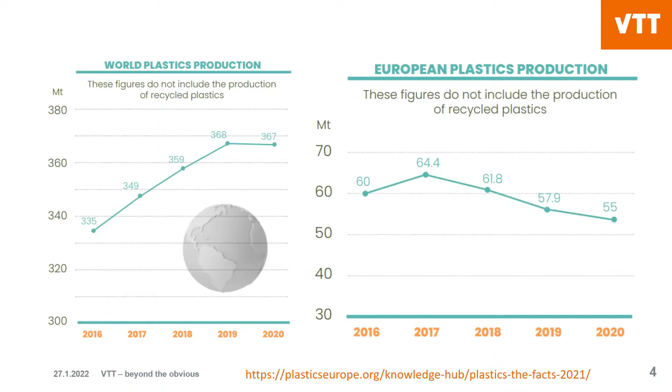So it's been skyrocketing — the demand of plastics in different applications, in different products, worldwide production of plastics. Even in the European context, plastic production is basically increasing and increasing. But there is a bit of a decrease we see very recently, maybe one of the reasons being COVID — you see, for example, in 2019 and 2020 there is a stability. But there is also a lot of research around why plastics can be replaced by some other materials.

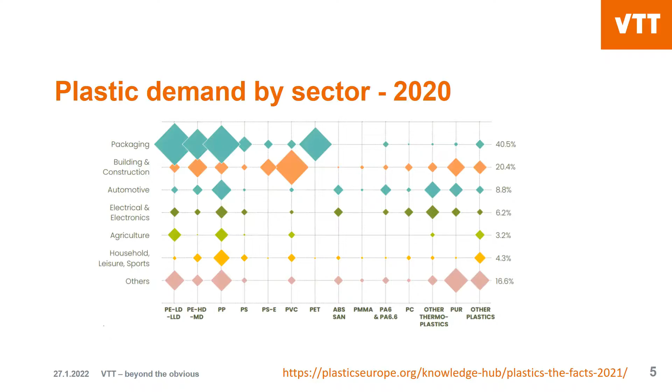This gives an idea of what kind of polymers you will also expect when it comes to recycling, because of course these are the plastics or polymers that will eventually end up as waste. This also gives an estimate of what you can expect. But what happens when it comes to end of life?

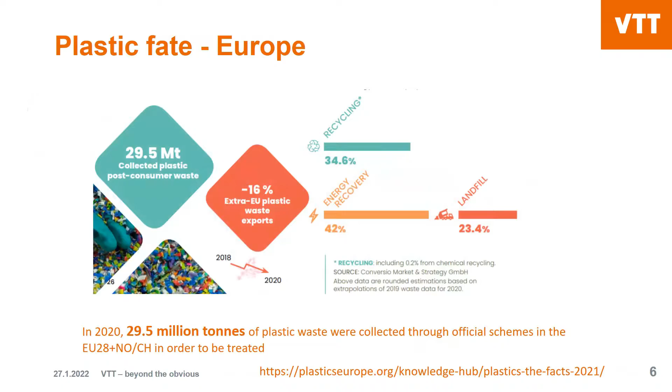You also have to understand what recycling actually is. There is closed loop recycling, there is cascaded recycling, and then there are process losses, of course. Closed loop recycling is when you have a polymer and you bring it back to the same polymer or the same application—so you have a bottle, you make a bottle again, and then you make a bottle again. This is called closed loop recycling. If you take a bottle and make something of inferior quality, that's cascaded recycling. And then in all of this recycling process, there are also losses.

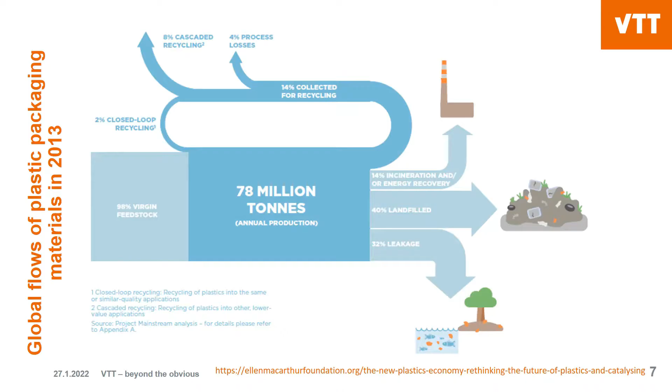The statistics are very important—you have to understand how much of this plastic is available. Then there's pre-treatment of this waste, because the complexity of different types of plastic waste is huge. Sometimes you get very nasty compounds in the plastic waste, sometimes you have different types of impurities in the waste. So the pre-treatment of the plastic waste is quite an important part of the value chain.

Of course, the recycling technology we are talking about today includes all different types of recycling—mechanical recycling and chemical recycling technologies. What are the products we are aiming at from this? What are the upgrading techniques to look at? And then, of course, standardization is really important. When you make a product, you cannot put it on the market unless you have a standard product. You can make an excellent product, but if it's not standardized, you are not allowed to put it on the market.

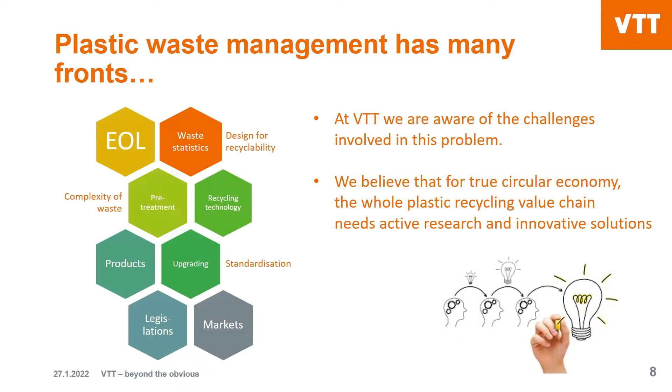No, it's okay. Okay, I heard something. I cannot see, but I'm just talking. If there is any question, just please stop me and you can ask.

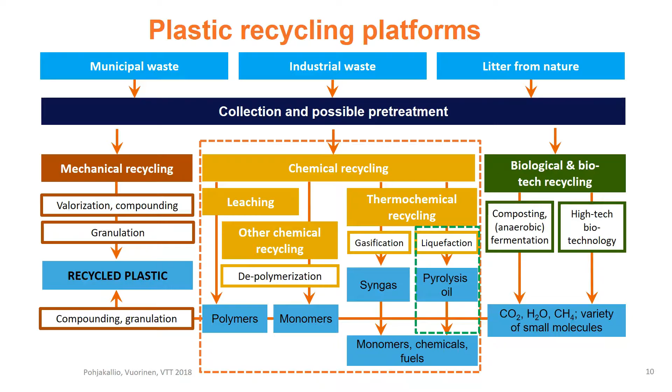If I try to put these technologies in perspective, I don't know, can you see my mouse on the screen? Yeah, indeed. Or maybe this is better.

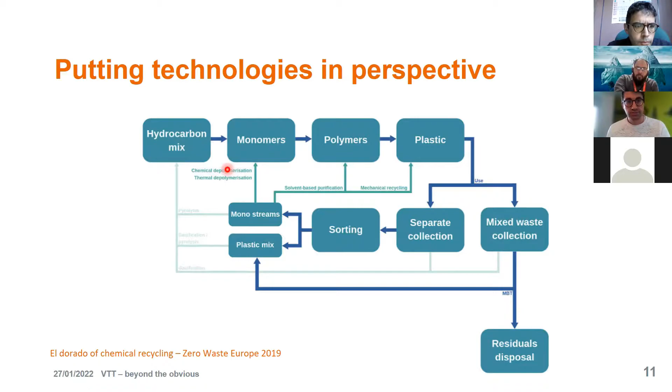So if I start from here, this is the hydrocarbon mixture. Basically from crude oil, you steam crack it, you get monomers, you make polymers out of these monomers, so these are plastics. But once you use the plastics, you can separately collect it, or put it in a mixed waste collection. From the mixed waste, it goes into a plastic mix, or then it goes directly, if it's good enough, to gasification and back to hydrocarbons.

If it is separately collected, then it can go either to sorting and make monostreams, meaning you have very defined streams of polyolefins, PVC, or different types of PET materials. So if you have monostreams, you can pyrolyze it. You can get back either the hydrocarbon mix, or use a chemical depolymerization technique to get back the monomers.

I will talk about those techniques also in my upcoming slides, but this is to put the technologies in perspective, where these technologies can be used for which type of plastic waste. If it is very heterogeneous waste, you can use gasification or pyrolysis. If it is a very pure monostream material, you can use pyrolysis and get the hydrocarbon mixture. Or if it is clean, you can also use solvent-based technologies, get polymers, or mechanically recycle it back to plastics.

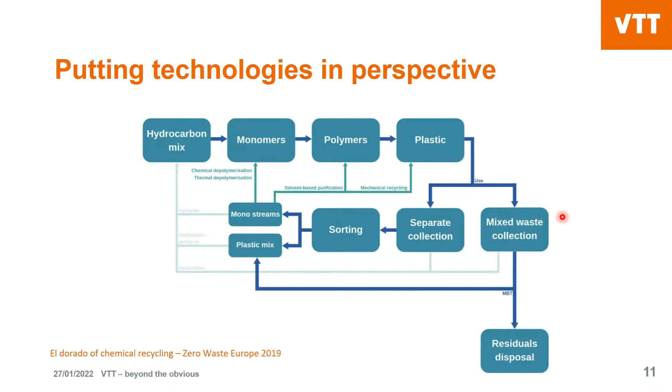This basically explains how different recycling technologies work in an actual value chain. If you look a bit more into the type of waste, this is important to explain why we are applying which technology, why we are applying mechanical recycling, and why we are applying chemical recycling.

So if I say there's post-industrial type of waste or post-consumer type of waste, it can be scrap, processing scrap that can be monoplastics or mixed plastic, or other mixed plastics. For example, if you have monoplastics, that means you can have runners or a fallout product. But if you have, for instance, mixed plastics, it could be multi-layered plastics, foils or sheets. These are all the different examples of different types of waste that is found, and based on these, you can decide where they can be directed.

For example, they can be used internally in the process. These need some sort of recycling or recovery. For instance, a PET bottle is a good example to say it can be recycled. If you look at the quality or properties of these materials, we see that this stream is a monostream, which is a bit more clean, and the composition is known. Similarly for others, you can decide based on where the plastic waste is coming from and where it should be directed.

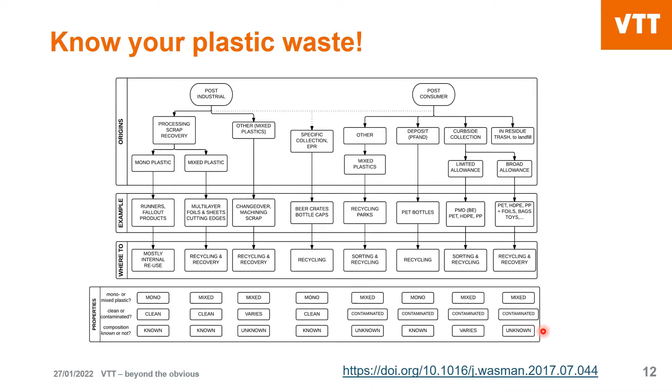Then I will go into the chemical recycling techniques.

We have Muhammad, sorry, there is a question in the chat. Do you prefer that we keep them for the end? It's up to you, what do you think? Well, I think it's maybe better that we go through, and keep all these questions for the end discussion. Okay, that's fine, so you can just type in your questions, and I can go through them at the end, that's okay?

Yeah, perfect. Okay, basically, what makes chemical recycling attractive? There are several reasons why chemical recycling of plastics can be attractive. It can provide you a source of energy, which means pyrolysis oil. It's an eco-friendly fuel, depending on how you think it is produced, compared to other types of fuels. It's an eco-friendly fuel comparatively.

A range of products means from pyrolysis oil you can actually get many different chemicals. Food grade material means the monomers or primary building blocks of the plastics that you get from the pyrolysis oil are so clean that it can be used in food grade applications. For instance, polystyrene is one polymer that can be depolymerized into styrene, and the styrene you get is very pure, so you can basically make food grade material out of it.

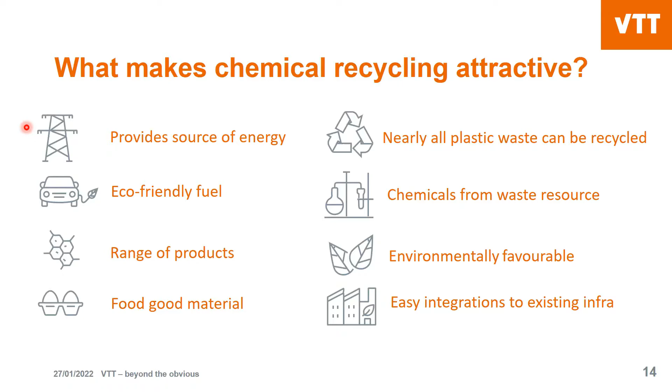Then I will go through some types of chemical recycling and give you some examples. For instance, solvent-based purification, which is based on the solubility of the polymer in a certain type of solvent.

So you have a plastic, different types of plastics. For instance, multi-layer plastics having two different types of polymers blended together, but you may be interested in only one of those. Some solvents have solubility for certain polymers, so the solvent basically dissolves the polymer and the impurities are removed. With this technique, you get the polymers in very good quality.

The downsides are that you need a strict upstream sorting system, meaning the feedstock fed to a solvent-based purification system needs to be of very consistent quality with not many impurities. So if you are processing a multi-layer plastic of polyamide and polyethylene, the solvent will only work for that specific system, so it needs to be pure in that sense.

Only homogeneous plastics are possible with this method. It has a relatively high technical requirement, and the economic and environmental viability is also a bit unclear.

There are some examples that I have written here: CreaSolv, APK, Polystyvert, Ineos, PureCycle. These companies are using solvent-based purification. They also call it physical recycling, meaning that the polymer chain is not broken in this process. The polymer is just dissolved and then retrieved.

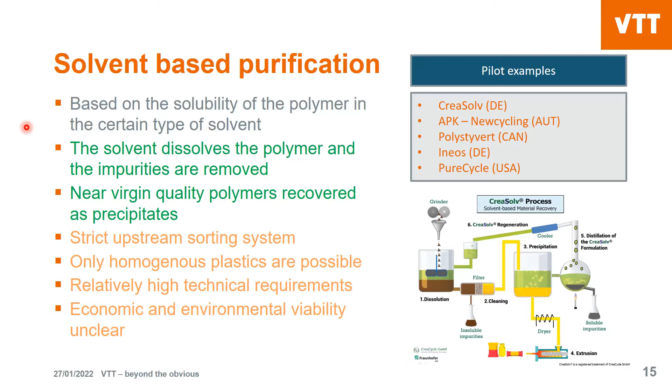Then chemical depolymerization is another method. You have probably studied hydrolysis, alcoholysis, or aminolysis. This is actually the exact reverse of polymerization. In polymerization, monomers join to make a polymer, but in chemical depolymerization, there is a solvent that breaks the polymers into monomers.

A very important example of this technique is PET depolymerization. PET can be depolymerized into its monomers through different techniques: glycolysis, methanolysis, or hydrolysis. It is hydrolysis if water is used as a solvent, alcoholysis if alcohol is used, and aminolysis if amines are used as solvent.

This technique is suitable for polymers like PET, polyamide, and polyurethanes. In this one also, you need strict upstream sorting and only homogeneous plastics. So if you are recycling PET, you only need PET; if recycling polyamide, you need polyamides. Mixtures are probably not so welcome in this technique.

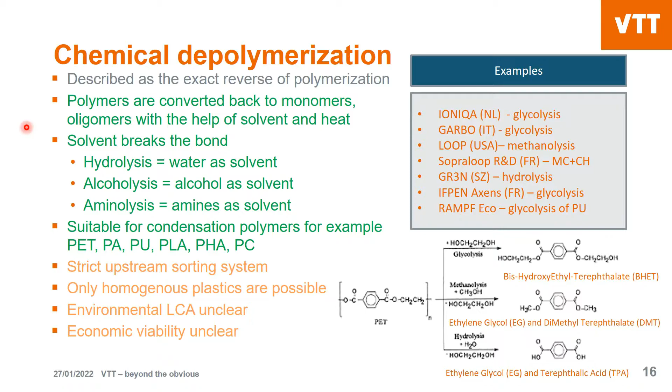These are some examples of companies using different types of these techniques. Then I come to also the thermochemical conversion technique.

Thermochemical conversion technique, pyrolysis, which we will talk about in more detail in later slides. It is the thermal degradation of plastics into liquid fuel components, where basically the organic part is vaporized under thermal atmosphere without the use of oxygen. There is no oxygen.

It's thermally degraded into smaller molecules. This is suitable for end-of-life mechanically non-recyclable plastics. You can use any type of plastic, but preferably this should be used for plastics that cannot be recycled mechanically, because mechanical recycling should always be the first option. If you cannot do it mechanically, then take it to pyrolysis. In this technique, you recover valuable hydrocarbons, including some monomers that you can repolymerize.

Heterogeneous plastics can be treated, so mixtures of plastics. Selectivity and yield can be optimized with a suitable catalyst. So the product you want to get, and the quantity, can be optimized by tuning the parameters of the pyrolysis, or by using a suitable catalyst. Some mild pre-treatment can be needed.

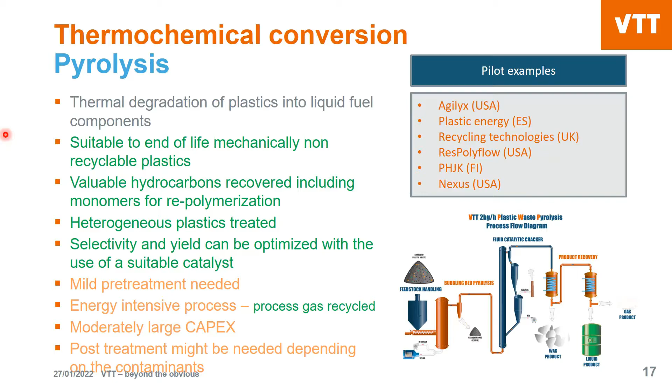Okay, now I'll talk about gasification. Gasification means you are gasifying everything, turning the plastics into syngas, which is carbon monoxide and hydrogen, and these are the building blocks for chemicals.

This process happens at high temperatures in the presence of steam or air, and the carbon monoxide and hydrogen can provide a variety of valuable chemicals through different reaction routes.

Pre-treatment is not needed in many cases because gasification is very flexible on feedstock quality, and heterogeneous waste is possible. But this process is very energy intensive, and gas cleaning is needed because the gas that comes out can be very dirty. It requires a lot of investment, high capex, and in order for gasification to be profitable, large infrastructures are needed. So these systems cannot be made at small scale because they are not really profitable.

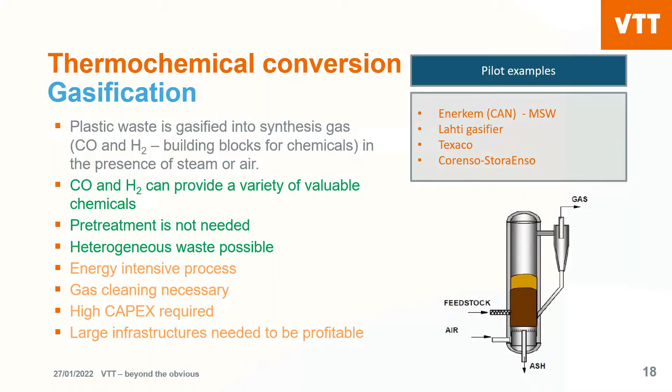But now let's go into plastic pyrolysis. If I take the example of polyolefins, you can take these thermochemical pathways: pyrolysis, gasification, cracking. What kind of products do they give?

If you take polyolefins and thermally or catalytically pyrolyze them, you get a range of products: light olefins, aromatics, fuels, or waxes. If you gasify them using air gasification or steam gasification, you can get energy, or a carbon monoxide and hydrogen rich gas that can be used for making valuable chemicals, and so on. So these are the different thermochemical recycling pathways for plastics conversion.

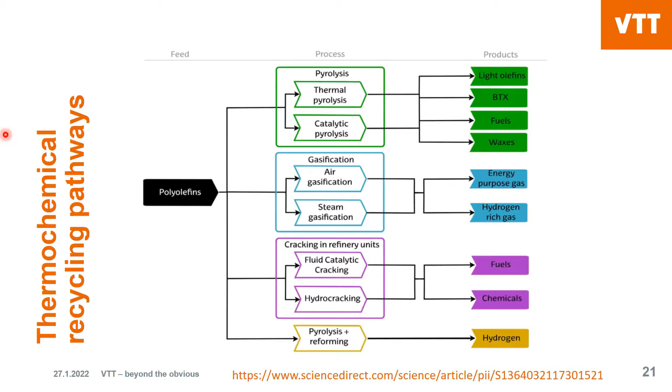Now, if I look closely into pyrolysis, what kind of products can we obtain at different reaction conditions? By that I mean mostly the temperature and residence time of the reactor. At 500°C, a moderate temperature for pyrolysis, under thermal pyrolysis with no catalyst and very short residence time, the products are basically waxes. Plastics will be converted into waxes.

If you use moderately high temperature, between 650 and 800 Celsius, with moderate residence time — a bit more than short residence time, which I'd say is between 1 and 2 seconds — then you get aromatic compounds. If you have very high temperature, more than 800°C, and very short residence time, then you get gases, which are basically rich in light olefins.

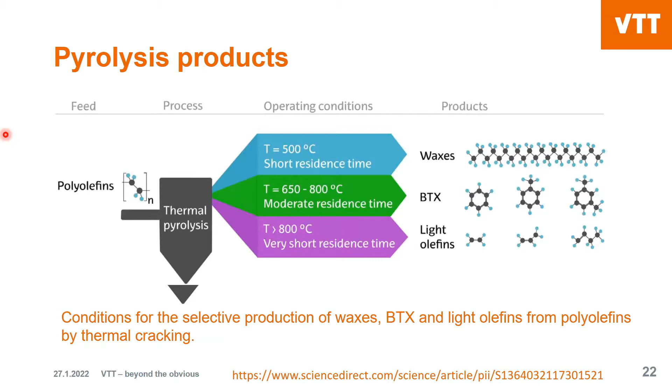What are the factors that affect the product distribution? What defines what your product would look like from the pyrolysis? Temperature, pressure, heating rate, feed composition, residence time, and reactor type — they all influence your final product.

In fast pyrolysis of polyolefins, lower temperatures give you liquids and waxes at less than 600 Celsius. If you go to higher temperatures, you favor gas formation. Pressure has not so much effect — the effect of pressure is dominant only at lower temperatures, but at high temperatures it's not relevant. Heating rate is very relevant.

If you have a higher heating rate, you are basically breaking the bonds of the polymer, so you get bond cleavage. But with a lower heating rate, which means slow pyrolysis, you tend to form char instead — a secondary product, char, from the plastics.

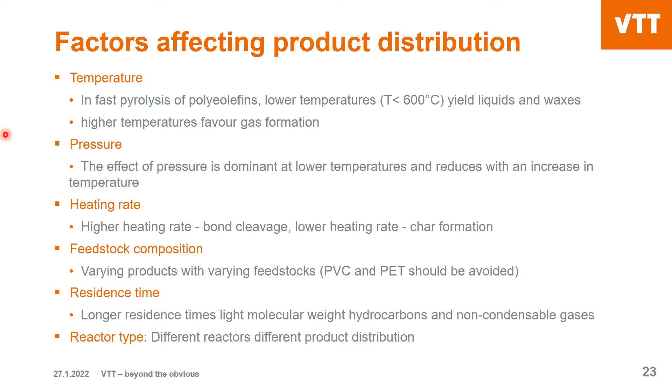Feedstock composition means what kind of feedstock is welcome for pyrolysis. As I said, it welcomes heterogeneous types of plastic waste. It can have polyolefins and others, but preferably PVC and PET should be avoided in the plastic mixture.

PVC tends to degrade into chlorine, and PET tends to degrade into acids. So these two polymers should not be in large quantities in the feedstock, because then your oil will be contaminated with halogens, with chlorine, or your oil will be acidic, which is of no value for future use. So these two types of polymers should be avoided.

Residence time also has a very important role in pyrolysis. In reactors with longer residence time, you get lighter molecules, lower weight hydrocarbons, and non-condensable gases. And in short residence time, you get the opposite of that.

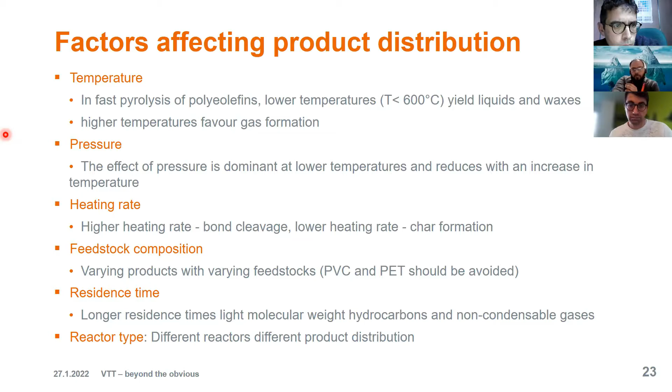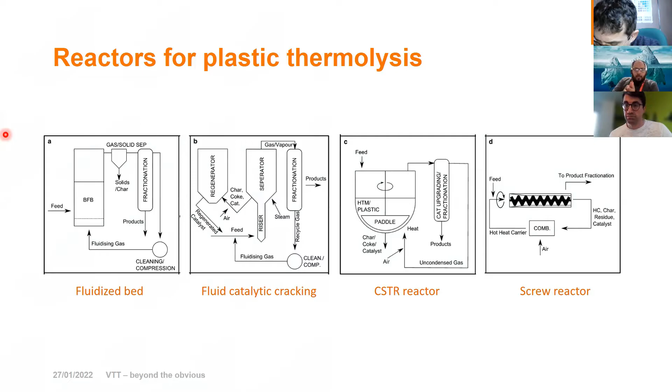Reactor types is really very important from the perspective of pyrolysis, and I will go through, probably in some slides, deeper into what are the different reactor types used in pyrolysis. Basically they can be categorized into 4 different main types, though there may be others: fluidized beds, fluid catalytic cracking systems, CSTR reactors, or screw type reactors.

What is a fixed bed reactor? Basically, they are very small scale reactors used in labs. They operate in batch mode, which means the plastic is placed in the reactor on a static bed, because it's a fixed bed. Any inert material here could be sand or something, and then you put your plastic in.

You heat it up, and then the pyrolysis vapors are condensed in the condensing system, and the gas is collected in a gas bag. It operates in batch mode, so you cannot put the plastic in continuously. The heating rate for this system can vary between 5 to 25 centigrade per minute. The loading, meaning how much plastic you put in, depends on the type of system, but it's still very small, 1-100 grams.

Continuous inert gas is required for purging the pyrolysis product. So you need to have some sort of driving carrier gas that takes the pyrolysis gas away from the reactor into the condensing system.

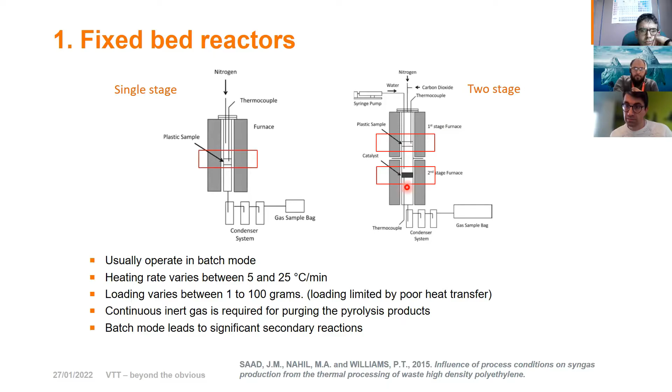It can be used in thermal mode, which is a single stage, where only plastic is degraded and the products are condensed. But on the other hand, it can also be used in 2 stages, which means the plastic is degraded and the vapors are then in contact with some sort of catalyst in a second stage. So catalytic upgrading of the vapors happens here. But these are lab scale units, good for screening, not really for any production.

The advantages and disadvantages of these types of reactors: they have simple construction and are easy to build. Economic operation and maintenance of the unit. It can be 1 stage or 2 stage depending on what kind of product you want, and they can be used in both thermal and catalytic mode.

The disadvantage of this type of system is that temperature control is difficult because the heating is from the outside and there could be temperature gradients. There is poor heat transfer. The catalyst is not replaceable during the operation. So once you have the catalyst, you will just use that. It cannot be replaced during an operation.

Bed channeling means that a product can just channel in the bed. It is not distributed, which can trigger hot spots in the channels, or can lead to secondary reactions forming char or coke. Then this coke deposition on the bed forms a blockage, which means it will increase the pressure drop in the system.

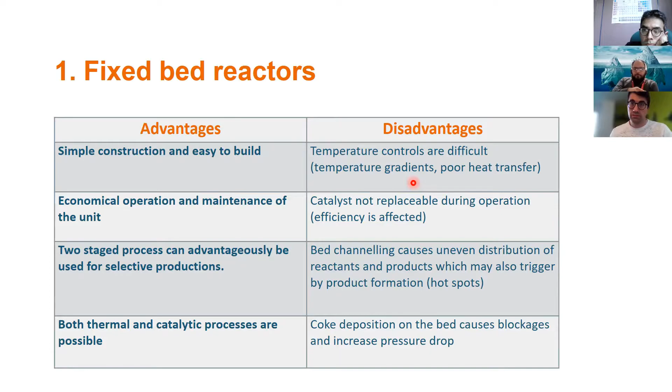Fluidized bed system. In this type of system, you have a bed of inert material, and when you sparge an inert gas through this, then this bed is fluidized. As you can see here in this fluidized mode, the bed height is much larger than what it is initially, and the packing of the bed material is very different, as you can see here.

These type of systems are widely used in plastic pyrolysis, and some of the studies for the research go back into 1970. If you want to look up, Kaminsky is one of the persons who has done a lot of research in fluidized bed reactors for plastic pyrolysis.

They have been tested for up to 30 kilograms per hour on several plastics, and different types of fluidized bed reactors are possible: circulating fluidized bed, bubbling fluidized bed, or conical spouted bed reactors.

Circulating fluidized bed means that the bed basically is entrained into a vessel and is regenerated and then transported back into the reactor. So the bed is moving out of the reactor, goes into the vessel, and then comes back, and it's circulating. This is called circulating fluidized bed.

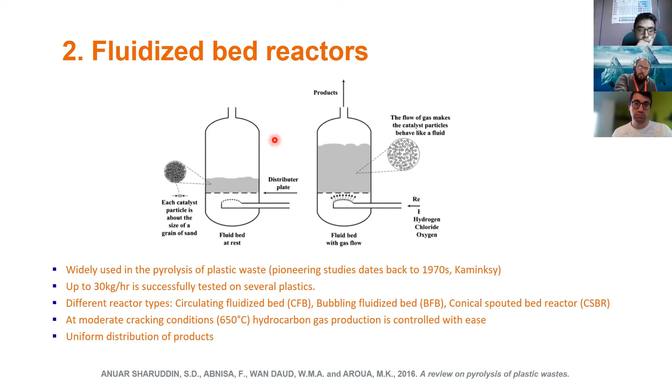This is very advantageous when you have some sort of a catalyst as a bed material, because in the second step you can regenerate the catalyst and bring it back, so burn away the impurities or the coke from the surface.

Bubbling fluidized bed is what you see here. So it's just bubbling, it's not circulating, it stays within the reactor. Conical spouted bed reactors are a special type of fluidized bed reactor with a different geometry, with a cone geometry, which is why it's called conical spouted bed reactors. I will talk more about this in my next slides.

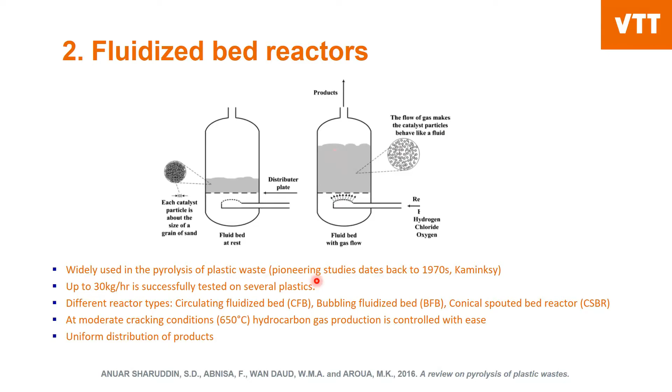If I talk about the advantages and disadvantages of this type of reactor, fluidized bed reactors basically have high heat and mass transfer and solid mixing regimes.

You can vary the gas residence time in the reactor by adjusting the flow of fluidizing gas. If you have low fluidizing velocity, then you have higher residence time, and if you have higher fluidizing velocity, more gas, then your residence time in the reactor is decreased. So you can vary that by changing the fluidization gas.

The product distribution can be flexibly changed depending on what kind of gas residence time you choose to have. Then it's possible to operate this type of reactor continuously, and it's scalable. It's a suitable alternative for the use of catalytic cracking in situ, which means that you can have the catalyst in the bed, in the fluidized bed, as in situ cracking.

In this one, both thermal and catalytic processes are possible. Maintenance costs are not so high. On the disadvantages side, it has a bit more complex design and operation.

Then there's bed defluidization due to agglomeration under certain poorly optimized working conditions, you can have defluidization. So basically what it means is that if you, for instance, have bigger particles of plastics going into the bed, then if the residence time is not enough, they can...

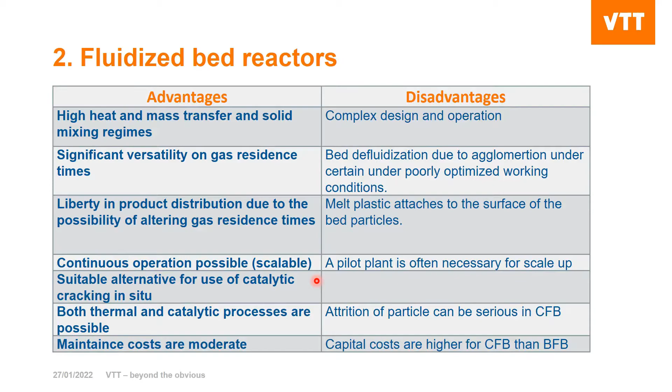...melt on the surface of, for instance, sand or any inert material, and this will defluidize and they will form agglomerates, which means that it's not fluidizing anymore. So the bed will go into the defluidization mode.

And on the other case, if you have the velocity of your fluidization gas not optimized, which means that it's not enough for the bed to fluidize, your bed will be in the defluidization mode. So that's possible, depending on the operational parameters.

In this reactor system, a pilot plant is often necessary for scale up. You need to have a bigger plant to go for the scaled up plant.

Attrition of particles can be serious in CFB. Which means that if you have a circulating fluidized bed, then your particles can break very easily also, because they are continuously moving from one reactor to the regenerator and then coming back and then going forth. So this movement of the bed can cause the particle attrition.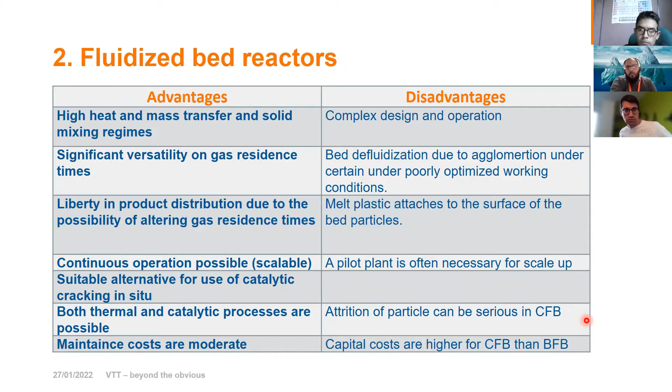They're a bit high, on the higher side of the expense. So the capital cost for making fluidized bed is a bit higher. And in terms of comparison between a bubbling fluidized bed and a circulating fluidized bed, the circulating fluidized bed is also far more expensive than a bubbling fluidized bed.

Conical spouted bed reactors, they are basically again fluidized bed reactors, but have a different geometry. So the reactor is basically a cone-shaped reactor, and this is basically done to maximize the solid mixing regimes. So the mixing in this one, in the fluidizing medium, is quite good.

It can handle particles of irregular texture, varying sizes, in the fluidized bed. So the proprietors of this technique claim that you can have different sizes of material going into the reactor and it will not be a problem.

It gives very vigorous gas solid contact. So when there's fluidization happening, the gas solid contact is quite good. There's a uniform coating of sand particles with fused plastics. So the plastics that go inside there, the mixing of that is quite good.

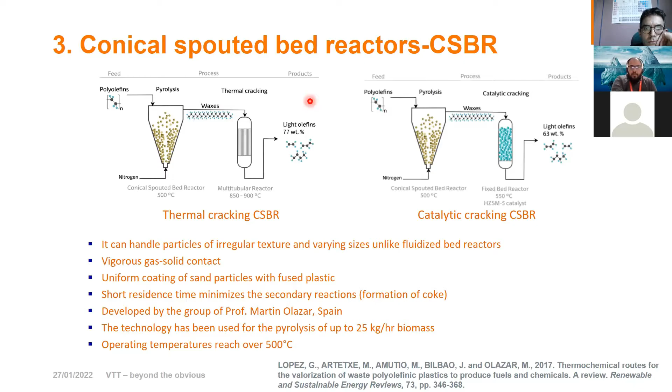Short residence time minimizes secondary reactions, meaning the formation of coke is minimized. This technique has been used in the pyrolysis of biomass up to 25 kilograms per hour, with operating temperatures going up to 500 Celsius. It can be used both in thermal and catalytic cracking.

Looking at the advantages and disadvantages of this type of system: there is high heat transfer rate, the temperature is uniform, and the residence time can be very short, which can be changed depending on the fluidizing velocity you choose. It can be used in continuous operation, has good control on the operating conditions, can be used with catalyst, and there is good contact between solid and gas.

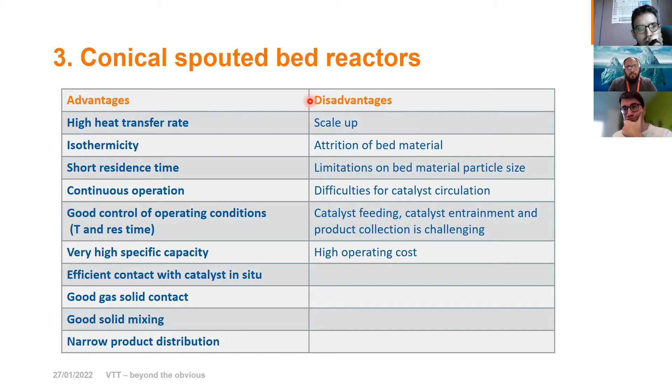On the disadvantages side, the scale up of this system can be a bit problematic. The attrition of the bed material can happen, there can be difficulties for catalyst circulation, and the feeding of the catalyst can be a problem. Catalyst entrainment can also be an issue, and by the looks of it, the operating cost of this type of system is also a bit on the higher side.

Then there is fluid catalytic cracking, which is also quite popular in conventional refineries. In this type of reactor, the plastic feed goes into the riser, and the bed material is transported into a regenerator, which can be catalyst. It regenerates and comes back as regenerated catalyst, which is then circulated. So it's a type of circulating fluidized bed reactor, as I was just telling you about.

In this type of system, once regenerated, it can be used in continuous mode for a long time, with catalyst regenerated and coming back. The gases and the pyrolysis vapor leave the system and go to fractionation, where you get the products out of it. It has been used widely in conventional refineries to crack vacuum gas oil into gasoline.

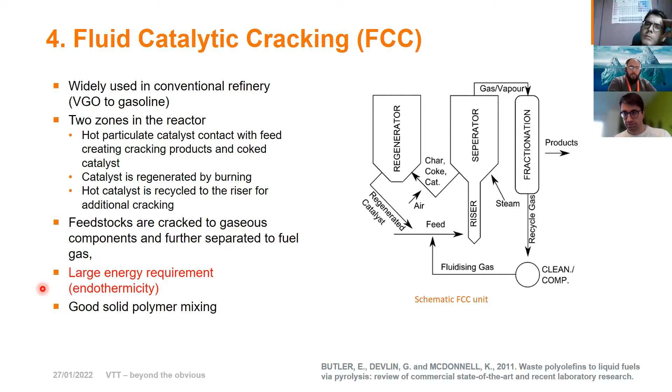There are two zones in this reactor. The hot particulate catalyst gets in contact with the feed, and then the catalyst is regenerated. Feedstocks are cracked to gaseous components and further separated to fuels in a fractionation step. This type of system requires a lot of energy, but on the other hand, it has good solid-polymer mixing because of the circulation.

Another important type of reactor used commercially is a screw reactor. One example is called the Haloclean process from Germany. In this type of reactor, the extruder is made up of a tubular reactor - a tube that has a conveyor inside, or what you call a screw conveyor.

The residence time in this reactor can be varied by changing the speed of the screw and the length of the reactor. The time of plastic degradation depends on how fast the screw is moving, because this transports the material from one end to the other, and also depends on the length of the reactor. If it is longer, you have a longer residence time for the plastics to degrade.

In this particular case, spheres are used in the Haloclean process to avoid any buildup of coke and improve heat transfer, because they are hot and remove any fused plastics on the metal surfaces. They are then collected and recycled back.

This system has been used for thermoset materials, for example printed circuit boards from electronic waste. It has been pyrolyzed in this type of system, and used for efficient removal of chlorine from mixed waste. There are different heating zones, meaning the heaters on the outside of the reactor can be operated individually.

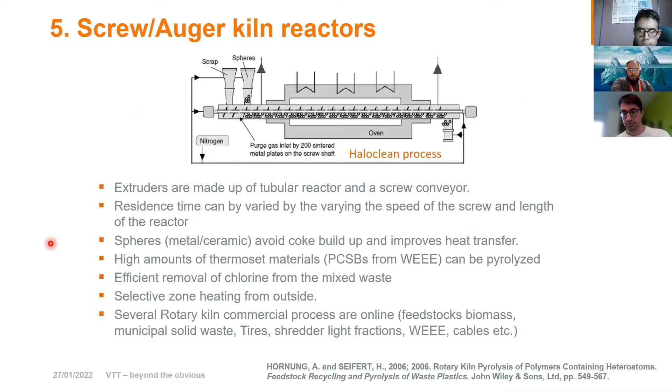So this zone can be lower temperature, and these can be higher temperatures, depending on how you want to optimize your reactor. They can be of the same temperature or different temperatures, depending on what you want in the end. Several of these types of reactors are being used commercially for different types of feedstock, including biomass, tires, or automotive waste.

One new emerging technology in pyrolysis is microwave reactors. They are still in their infancy stage, meaning they are at very low TRL. There are positive and negative sides to it. They are very attractive for heat transfer, because with microwaves it can reach up to 1000 Celsius very easily and very fast, since it's using radiation.

Plastics themselves are a poor conductor of heat, which means they have to be mixed with some sort of material that improves their conductivity of these radiations. So some sort of carbon is mixed with the plastics in this.

It's easy to design, but scale up can be difficult, and mixing of plastics inside a microwave reactor can be tricky. But you can combine it with catalytic upgrading of vapors, and depending on what kind of catalyst you use, you get different results.

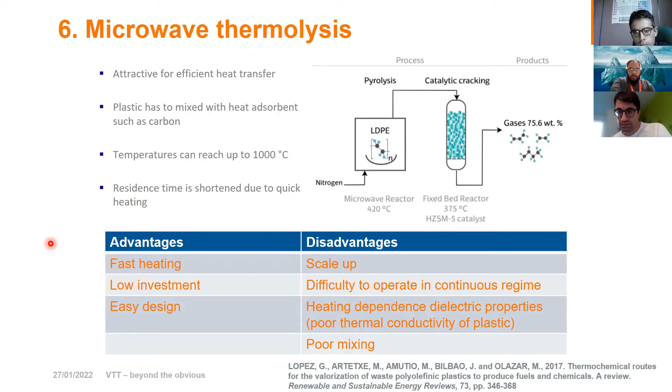Stirred tank reactors are also very interesting and widely used in this type of system. They can be internally heated or heated from the outside. They can contain catalyst with the plastic inside the reactor, but the upgrading can take place outside, so a distillation column can be used together with this type of reactor, where the pyrolysis vapor goes to catalytic upgrading or fractionation.

In this type of reactor, secondary reactions dominate, meaning you can get a lot of aromatics or a lot of char because of the residence time in the reactor. Longer residence time means more secondary products. It can require frequent maintenance, and because of the nature of this reactor, temperature gradients can also exist. But it has been used in several commercial technologies, some of which I have mentioned here in different countries.

Just drink some water.

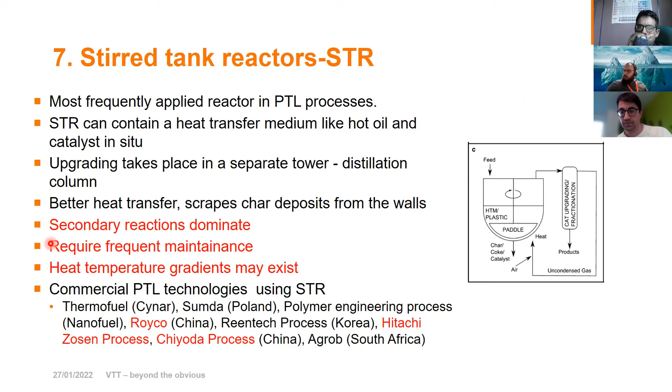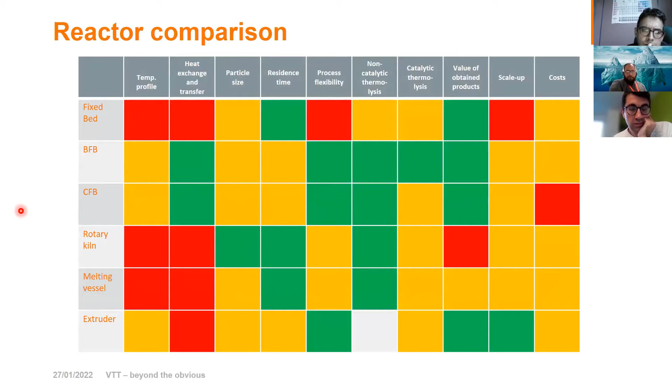Now I will jump to catalytic pyrolysis and try to explain the difference between catalytic pyrolysis and thermal pyrolysis. If you look at this picture, there is a comparison of thermal pyrolysis and catalytic pyrolysis.

In thermal pyrolysis, there is more energy demand. Basically, if you need to pyrolyze some plastic mixture and it needs 600 Celsius for degradation in thermal pyrolysis, in catalytic pyrolysis it might only need 500 because of the use of the catalyst. The catalyst lowers the activation energy, or the degradation onset.

So there's higher energy demand in thermal pyrolysis, meaning higher temperature requirements. There can also be impurities in the liquid fuel in thermal pyrolysis if there are impurities in the feedstock. The liquid fuel can contain impurities and can have a low octane number, but on the other hand, it produces high liquid yield with heavy oil. The gases from this pyrolysis are produced in lesser quantities, but can contain carbon monoxide and carbon dioxide. The char from this process can be in high quantities, even at low temperatures.

But if you use a catalyst for the same process, you have the possibility to remove impurities, because the catalyst can also act to absorb some of them. It also means you require less energy for pyrolysis, because less temperature is needed for the same degradation. Looking at the products, the liquid yield is decreased because gases increase—you get more cracking, more gases—but at the same time the quality of the liquid is improved, with a narrower range of hydrocarbons in the liquid fraction. The gases produced from catalytic pyrolysis contain a lot of valuable C3 and C4 compounds. In catalytic pyrolysis, char production is decreased, especially with catalysts having high surface area.

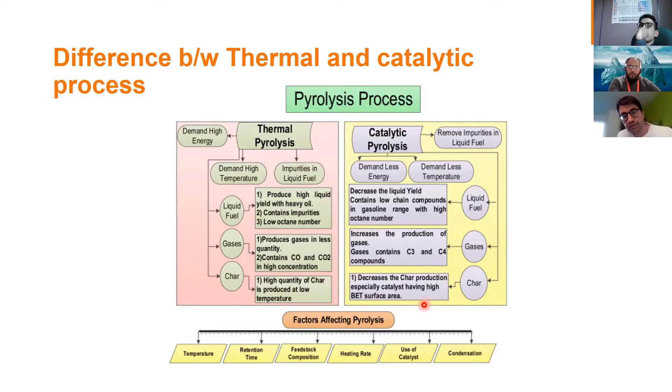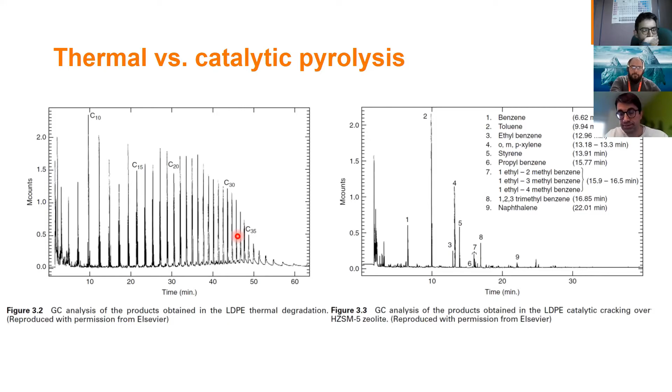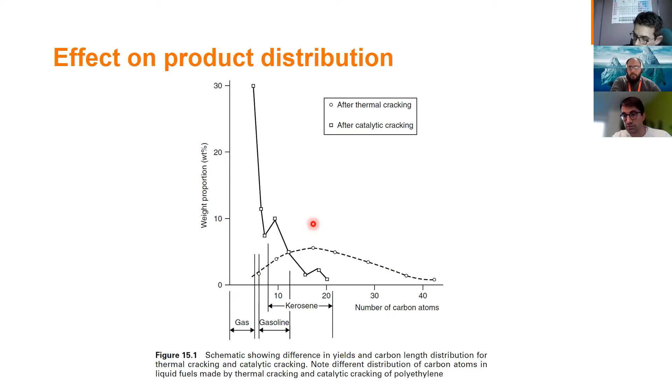This is why catalytic pyrolysis can be advantageous. What is the effect of the catalyst on the quality of the liquid oil?

Basically, the catalyst affects the pyrolysis mechanism and converts, for instance, heteroatoms like oxygen and nitrogen into the gaseous phase. It can decrease the halogen content in the oil. So if you have, for instance, chlorine in the oil and you have a suitable catalyst, then by thermal pyrolysis you can get a lot of chlorine in the oil. But if you have chlorine in the feedstock and you're using a suitable catalyst, you can capture a lot of chlorine in the catalyst, and then your pyrolysis oil is free of halogens.

For instance, a zeolite catalyst can decrease these types of heteroatoms like nitrogen, and it can also decrease phosphorus and sulfur content in the pyrolysis oil. Catalysts can remove oxygenated species from the oil. So for instance, if you have PET in the feedstock, it can induce oxygenated species in the pyrolysis oil. These types of catalysts can also reduce these oxygenated species from there.

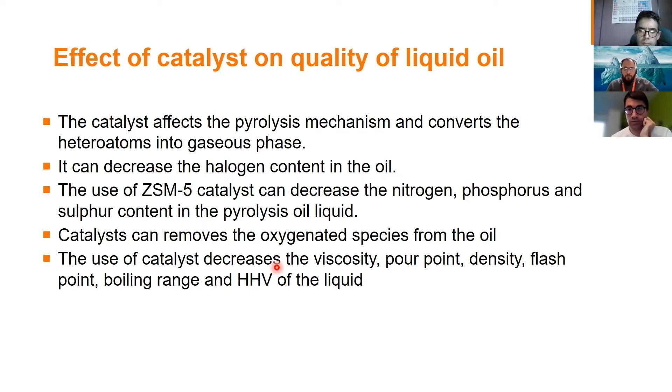The use of the catalyst can increase the quality of the oil by decreasing the viscosity, pour point, density of the oil, and different properties. Here you see the effect of the catalyst on different properties of oil. The density can drop, the viscosity can drop, the octane number can increase, the cetane number can increase, pour point can decrease. So these are several advantages of using a catalyst that will enable your pyrolysis oil to be useful. You can get some of these properties improved by increasing the temperature, but not all, and only to a certain extent.

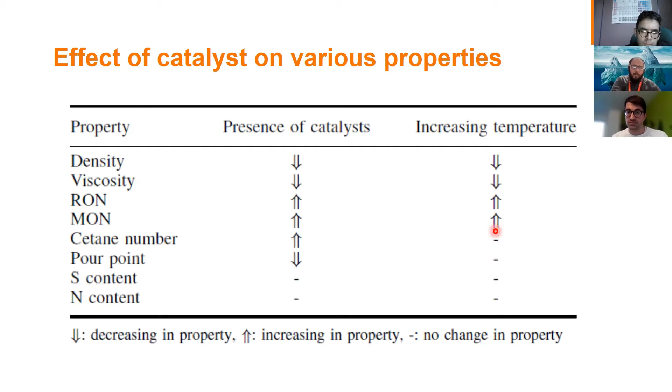So what is the effect of the catalyst on the gases produced? Basically, the catalyst produces gases, mainly hydrogen, methane, carbon monoxide, carbon dioxide, depending of course on the polymer used. For instance, PET can produce a lot of carbon dioxide and carbon monoxide. Polyolefins tend to degrade into very olefinic types of gases. For instance, this ZSM5 zeolite can produce gases that contain mainly C3 hydrocarbons from polypropylene and C3 and C4 hydrocarbons from packaging waste.

As I said, light olefins are produced in high quantities with the use of zeolite. So your gas is very valuable. It contains a lot of olefins that can be used to make polyolefins.

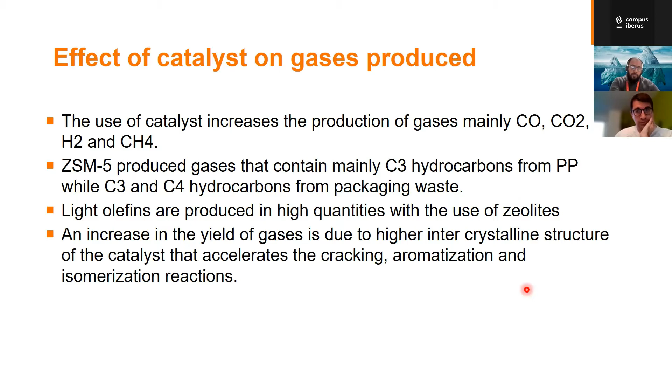Then I can quickly jump to other characteristics of the catalyst. Basically, there are various properties of the catalyst that impart different sorts of characteristics to the process itself: acidity, surface area, pore size, and the structure of the catalyst. An acid catalyst basically shows more cracking in pyrolysis compared to a basic catalyst, but at the same time a high acidic catalyst can produce more gases and decrease the liquid yield, which is not so good.

The acid catalyst can also remove impurities from the oil. And talking about surface area, the simple rule is: you have more surface area, you have more cracking. But at the same time, if you have more surface area, you have more cracking, but you have more gases, and then you have a decrease in the liquid yield. So there is a compromise where you have to adjust. For instance, zeolites have high surface area, and you can modify the surface area by thermal modification or by milling.

Pore size is also very important. On the basis of pore size, there can be microporous structures or macroporous structures. Microporous structures are small pores and they produce more gases. But if you have macroporous structures, they form liquid primary product at the outer surface. But if it goes into the pore itself, then you have more cracking inside, so you have lighter compounds.

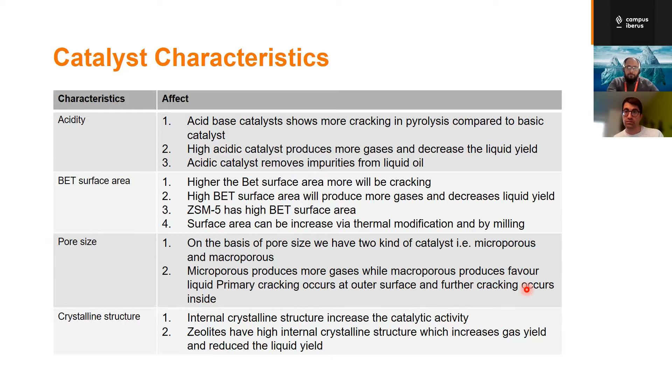This was for a pure polymer, HDPE, but this example is from a mixture of polymers. I will not go into detail here because this shows exactly what I showed in my previous slide, what happens in thermal and catalytic pyrolysis with different catalysts. But one example I can quickly show: if you have thermal pyrolysis of this mixture of polymers, PE, PP, PS, PET, PVC, pyrolyzed at 450 Celsius, you get 80% liquid and 17% gases. But if you use ZSM5 at 10%, you decrease the liquid and increase the gases. So again, this shows catalyst increases cracking, but at the same time the composition of the liquid phase becomes narrower.

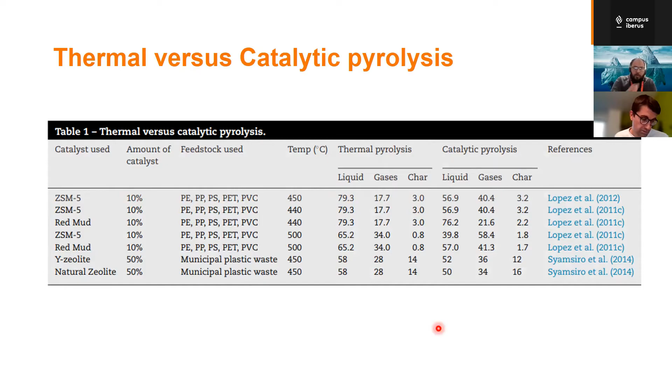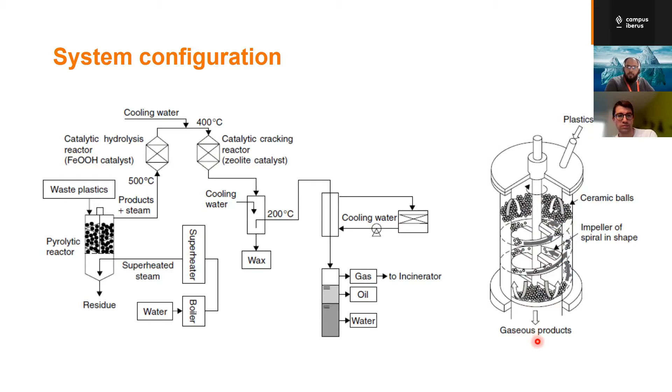System configuration means in what ways you can use the catalyst. You can use it inside the reactor. For instance, in this first example, the catalyst is inside the reactor, which may be called in situ catalysis. Or you can have catalysts of different types in other vessels, so the pyrolysis vapors leaving the system can be upgraded in different vessels containing different types of reactors, depending on what kind of product is needed in the end. Or in a different geometry, you can have ceramic balls of catalyst inside the reactor rolling like this, and then the gas is taken out from the bottom. I'm just giving you examples of the ways these catalysts can be used.

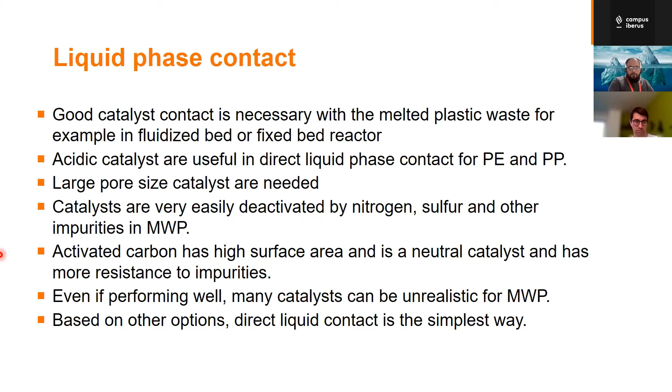One way of looking at it is thermal cracking plus catalytic upgrading, as I told you in one of the earlier slides: you first crack the plastic in thermal mode, then catalytically upgrade the vapors. This can overcome the problem of catalyst getting poisoned by inorganic impurities, because when you thermally crack it, you can retain solid impurities in a cyclone before bringing the pyrolysis vapors into contact with the catalyst.

So basically, what you do is low quality hydrocarbons are produced in the first step in the thermal cracking, and then you take this into a secondary reactor which has catalyst, and with the help of the catalyst you can obtain a high quality fraction.

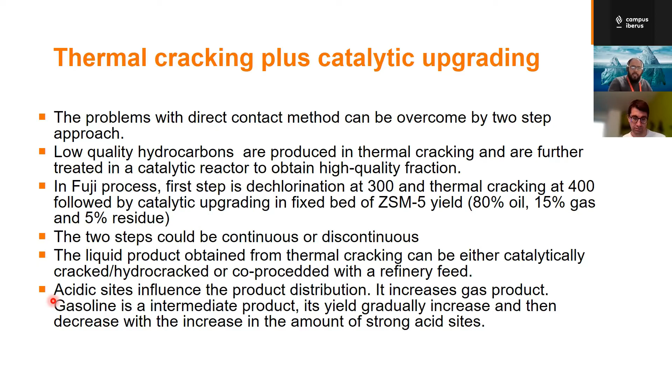But acidic sites are also one important factor that influences the product distribution. I already told you how these acidic sites, or the acidity of the catalyst, affects the quality of the oil.

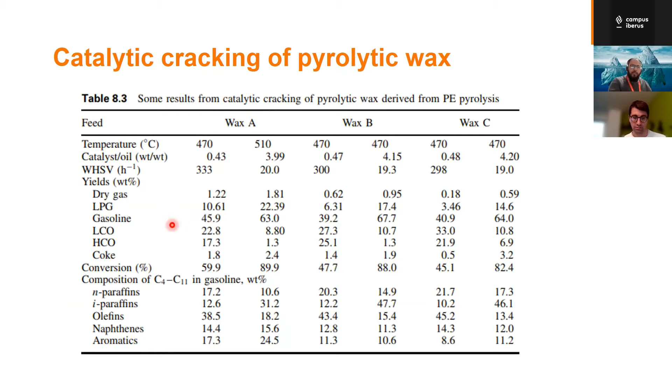In many cases, when you get waxes as a main product, you can catalytically crack these further into what you want as a liquid. What you want, for instance paraffins, olefins, or aromatics, depends on the end goal. But the example I'm giving here is that if you get waxes as a primary product from pyrolysis of different waste plastics, you can catalytically crack it further into liquid product.

I think I have already told you about the advantages and disadvantages, but very briefly here also: it basically lowers the reaction temperature, it decreases the energy requirement, the reaction is much faster, and you can have selectivity of the product more towards what you want.

So it's not a broad spectrum of compounds, you can actually tune it to the type of product that you want in the end, and it can also absorb different impurities, for instance chlorine, etc.

On the other hand, the disadvantage of using catalyst is that it needs regeneration. If you're not regenerating, your catalyst can be deactivated very easily from impurities. For instance, acid catalyst can be deactivated by coke deposition, and then it stops being effective as a catalyst.

Impurities such as nitrogen coming out from different plastics, for instance ABS plastic - acrylonitrile butadiene styrene - which is very common in electronic waste, contains a lot of nitrogen. And for example sulfur from rubber or tires can contain a lot of sulfur. These types of impurities can deactivate the catalyst easily.

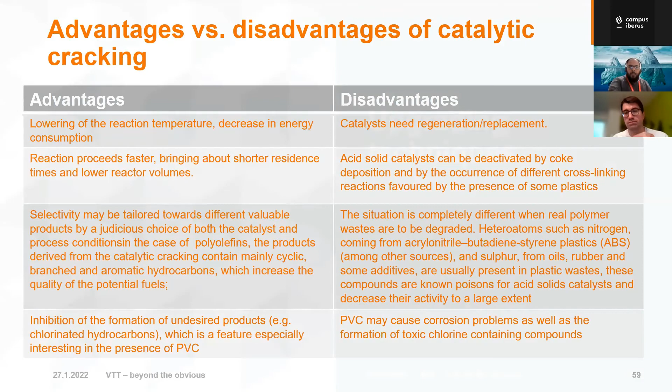Very briefly then, now about the post-treatment technique. So once you have done the pyrolysis and you have the pyrolysis oil, you have to look at the quality of the pyrolysis oil and what is needed to improve the properties of the oil.

You can do fractionation, blending, hydrotreatment, or dewaxing. Fractionation means you can take the right products out of your pyrolysis oil by distillation, for example. Blending means you can blend your pyrolysis oil with some sort of kerosene or diesel oil to improve the properties.

Hydrotreatment means you can basically use hydrogen to reduce the concentration of olefins or saturate the olefins in the product. Dewaxing, I told you about - if there are waxes or wax components in the pyrolysis oil, you can crack the waxes using some solvent treatment technique or some sort of catalytic means for cracking.

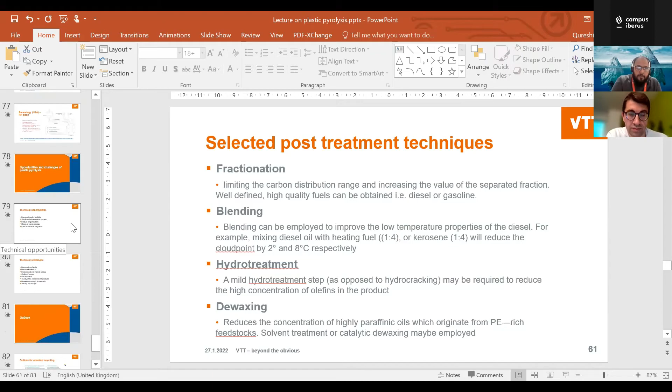Basically, in my other slides, I wanted to give you some examples of different sorts of commercial processes, but I think I can give you the slides and you can look at those examples of these types of plastic pyrolysis commercial systems and what are their characteristics. But maybe very quickly, I have gone through this already in my speech.